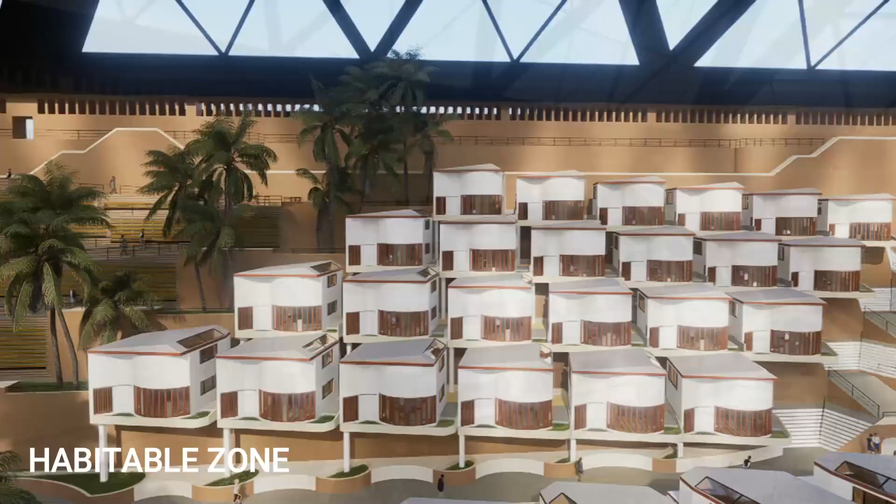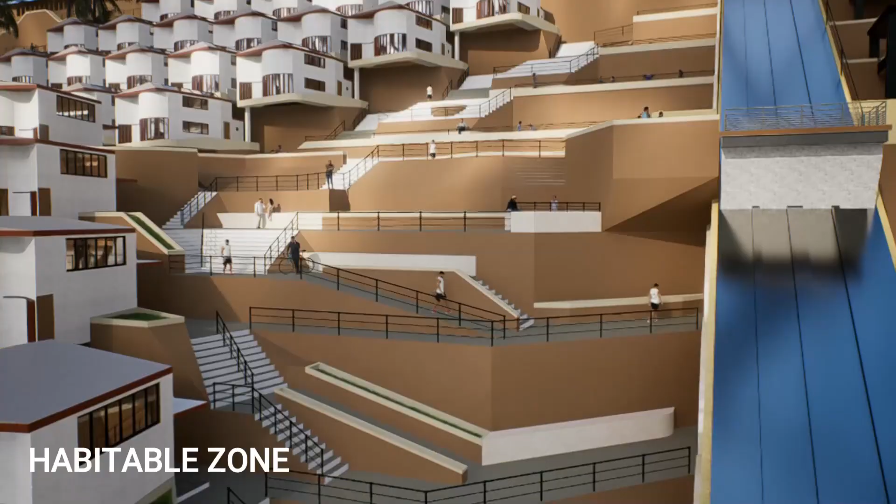The vision departs from traditional evacuation-based models, proposing instead a permanent subterranean community designed to safeguard its inhabitants without severing their connection to the land. By prioritizing the residents' safety and well-being, the project seeks to enhance their overall livelihood sustainably, ensuring that the threat of Mayon volcano does not equate to a cycle of poverty and displacement.

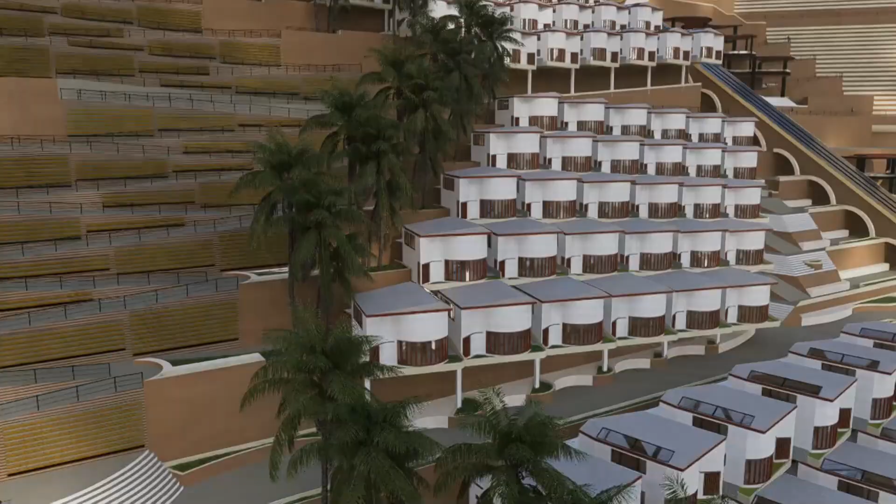Albay province is home to 15 municipalities, all of which exist under the geographical influence of Mayon volcano. Standing at a height of 2,462 meters, 8,077 feet, Mayon is one of the most active volcanoes in the Philippines.

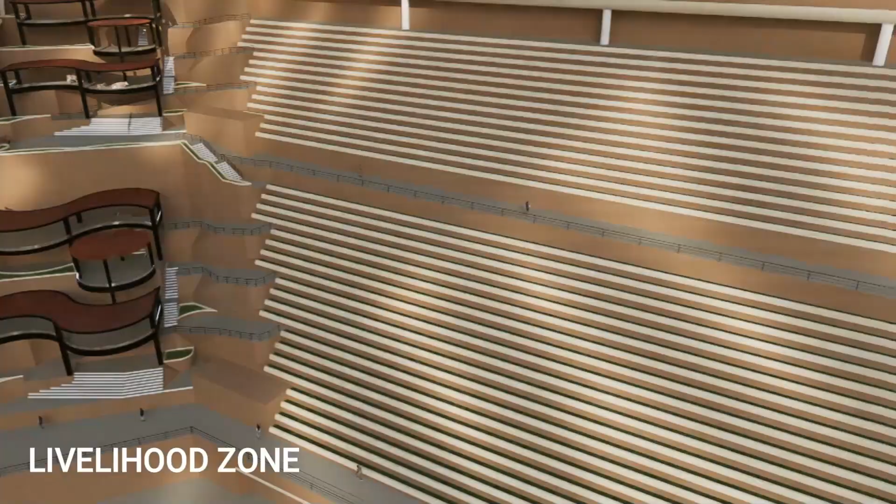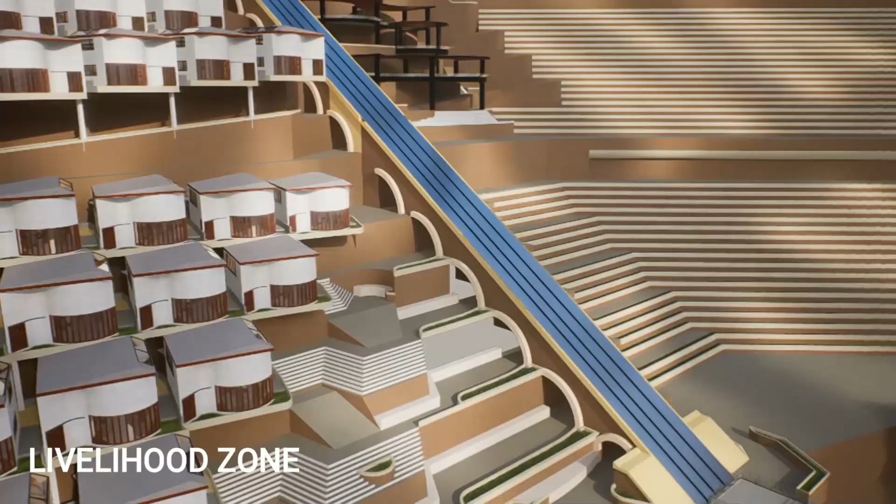The inherent dangers associated with its activity are diverse and catastrophic, including lahar and lava flows, destructive flows that can bury entire communities; pyroclastic flows, high-speed currents of hot gas and volcanic matter; ground rupture and induced landslides, physical shifts in the earth that compromise structural integrity; ashfalls, liquefaction, and flooding, secondary hazards that disrupt health, infrastructure, and agriculture.

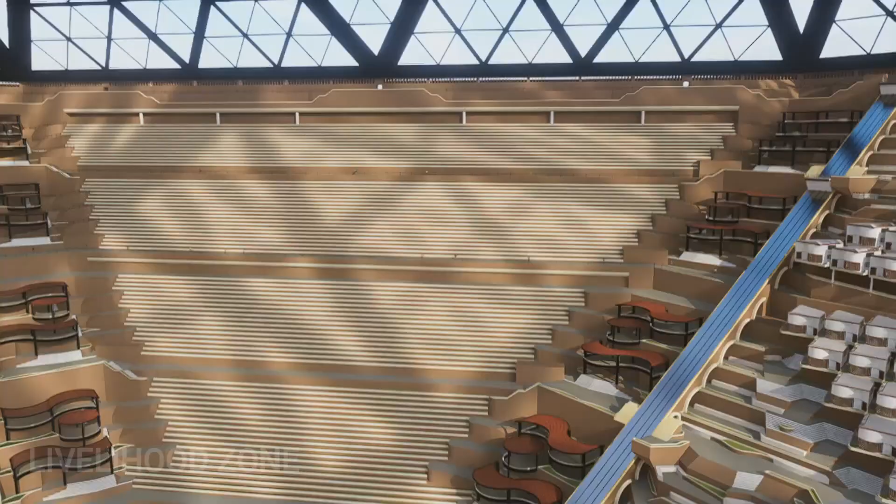Current safety protocols rely on a 6-kilometer permanent danger zone, PDZ, and an extended 7 to 8 kilometer PDZ. Volcanic activity is monitored through alert levels 1 to 5, requiring rapid response from various government sectors.

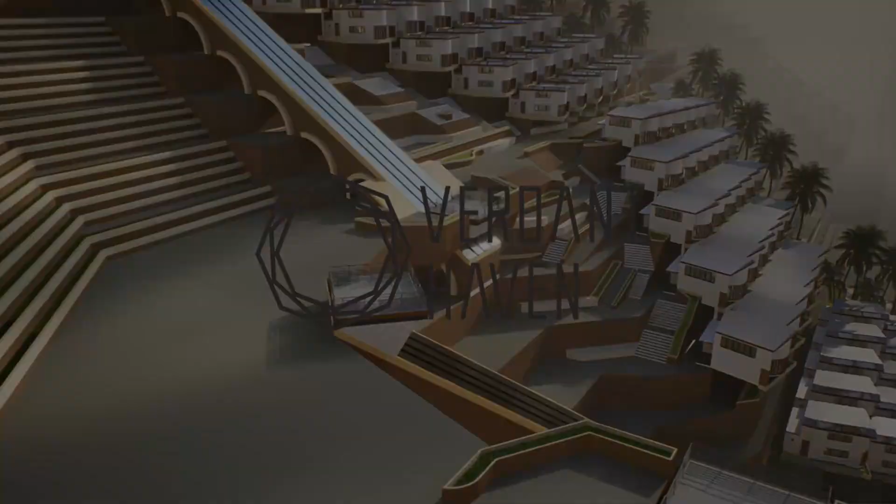The NDRRMP, National Disaster Risk Reduction Management Plan, oversees general disaster reduction, while the DOST focuses on prevention and mitigation. The DILG manages preparedness, the DSWD handles immediate response, and NEDA facilitates long-term rehabilitation and recovery. Verdant Haven proposes an architectural intervention that streamlines these multi-agency goals into a single, resilient living environment.

The research focus centers on subterranean architecture, or the practice of living underground. This choice is strategic: earth acts as a natural insulator and shield against the high-velocity impacts of pyroclastic density currents and the suffocating weight of ashfall.

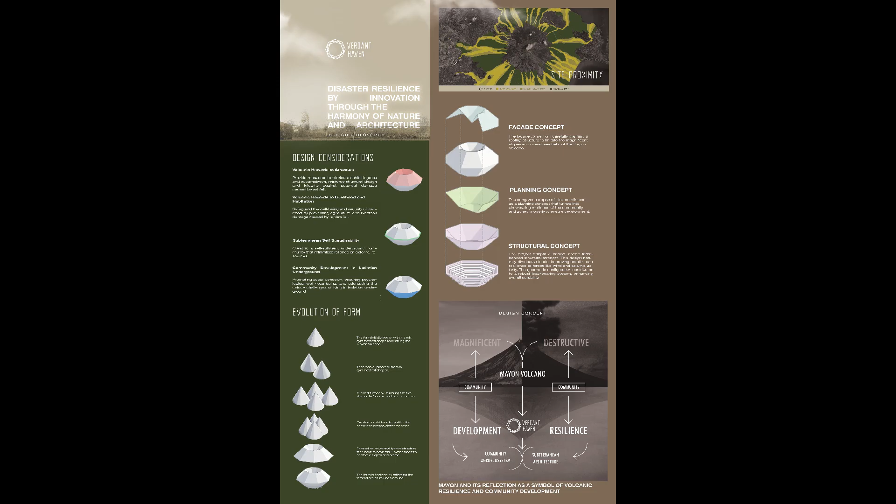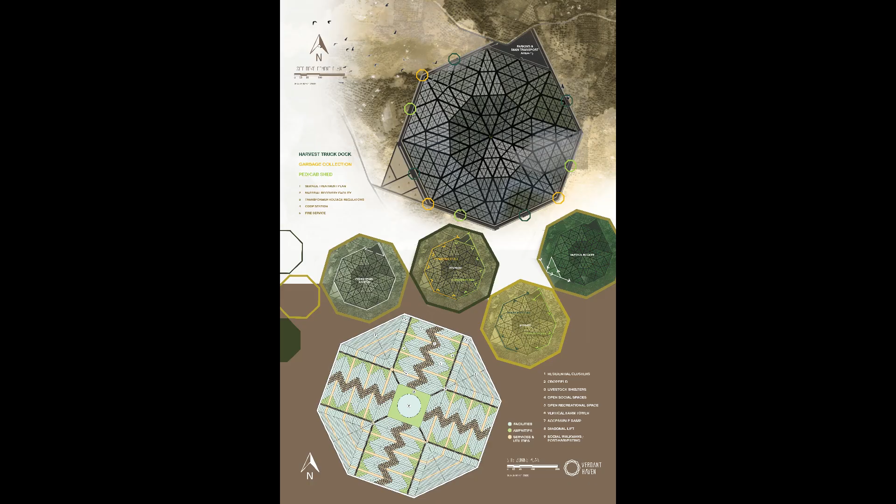To bring light and air into this subterranean space, the project utilizes advanced louvre-inspired technologies. For structural framing, the design employs steel space framing with tension cables, configured as steel tubes in a rhomboid shape, reinforced with cables and stiffeners to maintain high structural integrity against seismic loads.

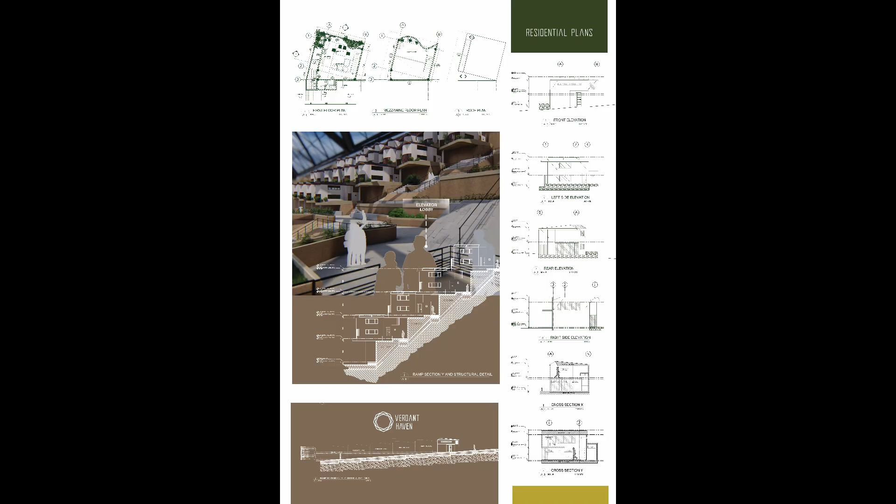Integrated glazing: the glass surfaces are not merely aesthetic, they include integrated glazing for thermal control. Self-cleaning glass: given the frequency of ashfall, the project specifies a cheaper photocatalytic coating made of titanium oxide, making the glass hydrophilic and ensuring that dirt slides off easily when in contact with water.

Electrochromic glass: for areas requiring more precise light modulation, an expensive electrically operated glass is used, utilizing metal ions in the coating to transition from clear to dark states. Adaptive solar panels are integrated into the design to mitigate the greenhouse effect within the glazed areas and provide renewable energy.

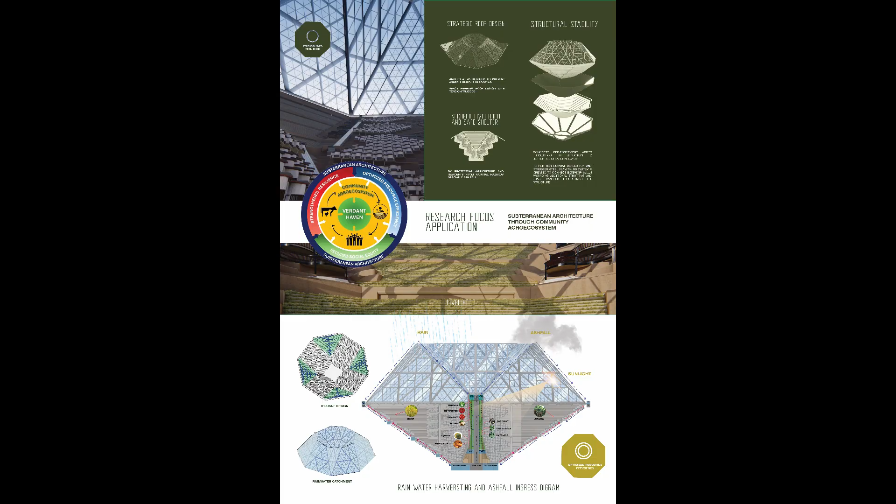Albay's economy is fundamentally agrarian, with 75% of the population involved in agriculture. The region produces rice, coconut, abaca, sugarcane, vegetables, and pineapple. It also supports livestock including carabaos, goats, horses, and sheep.

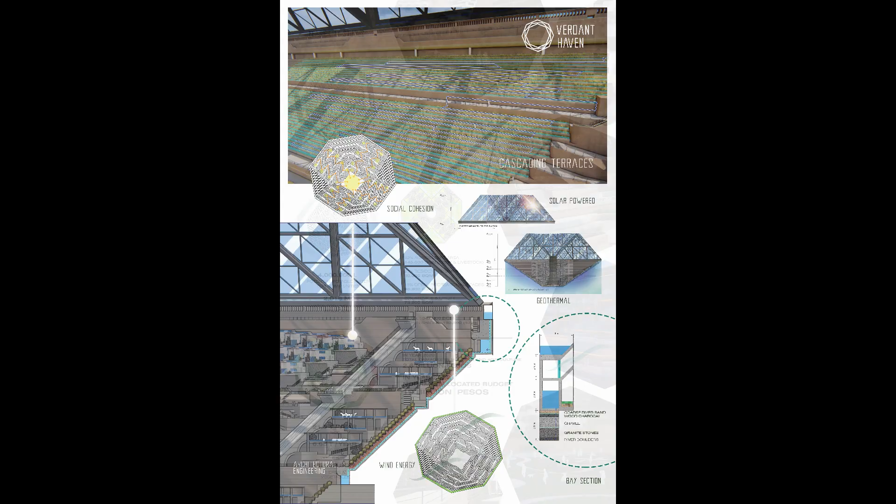Resources like timber, pili nuts, and rattan are also vital to the local economy. Verdant Haven integrates these activities into an agro-ecosystem, defined as a dynamic interaction between abiotic and biotic elements, encompassing both human and natural factors. This model uses permaculture to emulate the patterns and processes seen in nature, modifying natural communities to create a space where agriculture and human habitation exist in a symbiotic loop.